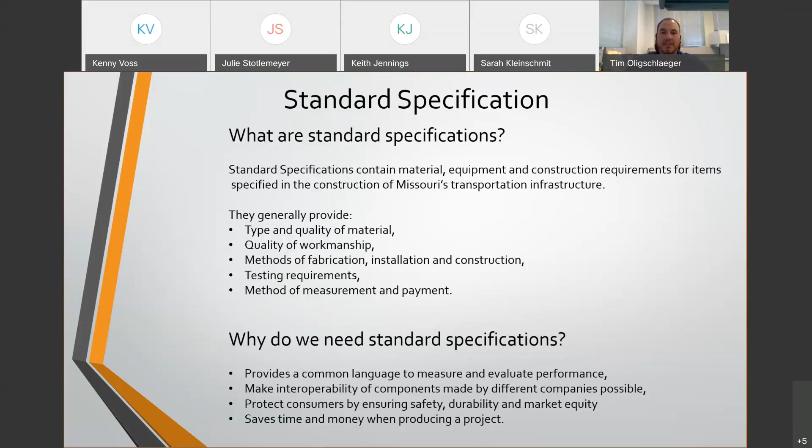You can access our standard specification from the EPG and other locations, but I'm going to show you how to access our standard specifications from MoDOT's homepage. Over in the right corner, you will see Doing Business with MoDOT. If you hover your cursor over Doing Business with MoDOT, you will get the following options.

Over on the right side, you will need to click on Standard Specifications, which is outlined with the red box. The page opens the Missouri Standard Specification for Highway Construction page, but you can access other standards and specifications like standard plans and job special provisions along the left side of the page.

In the first table, you will find the standard specification. We publish a new spec book every year, effective July 1 of that year. The original published spec book will always be at the bottom of the table. We make quarterly updates to the spec book, and you can find the revised spec book with the revisions included above the original spec book. The most up-to-date spec book will always be at the top as we add a new line to the table with each revision.

The next column over, you will find general provisions and supplemental specifications. This is where you will find what revisions were made to the spec book, but Sarah will talk more about this later.

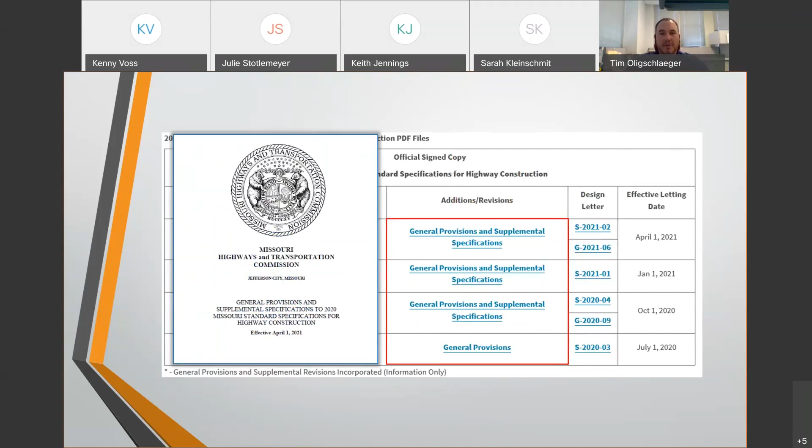The next column provides links to the Design Standards Letter, which provides a short description of the revisions to the spec book and general provisions. I will discuss this more later. The last column provides the date when the spec book and revisions are effective.

At the bottom of the specification page, you will see two tables. The first table is for the EPUB files for the current versions of the spec book. We create an EPUB file of the spec book so it can be uploaded to iBooks and downloaded to our customers' electronic devices like phones, tablets, etc. You can also download these files to your desktop. It will provide you with some different views and search options. Most people probably just use the PDF file and search it.

We also keep a Word file for every specification section. It makes it easier for staff to make and track changes. So if you ever propose a change to a specification, you can contact me and I can provide you a Word document of the section. In the last table, you will find the archived documents going back to the 2016 spec book.

We get a lot of requests from lawyers on what the specification was for this section on a certain date. We can go back in old spec books and find this information they need. We have more older specifications in the office, but you can easily come here and look up the information for the last 5 years.

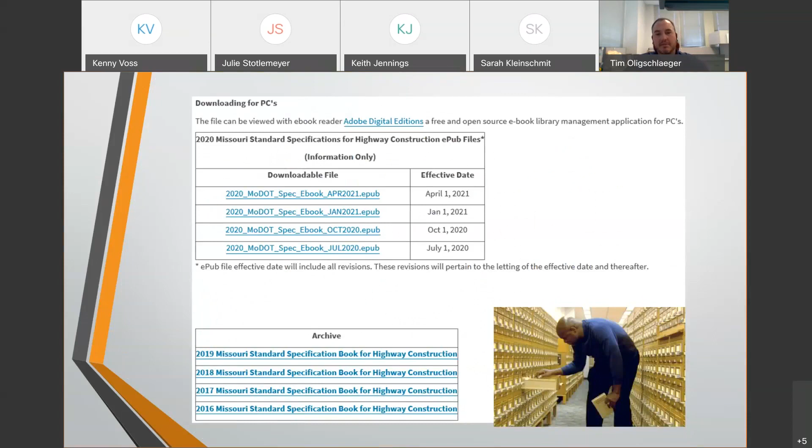Thank you, Tim. I will talk a little bit about the Missouri standard plans for highway construction. The information contained in the standard plans is like the standard specifications. This is where you go to see how work is going to be done if you're going to perform work for MoDOT. Any entity is bound to engage in their work according to these standards once they enter into a contract with us.

Also, like the standard specs, our standard plans are actual legal documents, and they are signed and sealed by a practicing licensed professional engineer. Typically, for us, this will be our state design engineer, state traffic engineer, and state bridge engineer.

Our standards are important for all stages of our projects. For designers, you build on these standards when you produce project-specific plans. You have anything from culverts, highway signs, ditch liner, or guardrail designed for and shown on the project plans, and we have the standards for them.

Contractors know how to bid and construct a project, and our construction inspection and material staff know how to ensure the projects are being built properly because we have these standards.

The standards are updated and published to the website quarterly throughout the year, and a new edition is published for the July updates each year.

The quarterly updates to the plans are a result of revision requests that we receive here in Engineering Policy Services. How and why these requests are made and who makes them will be discussed a little later in the webinar, but they do go through different levels of scrutiny depending on the complexity and cost associated with them before including the suggested changes into our standards.

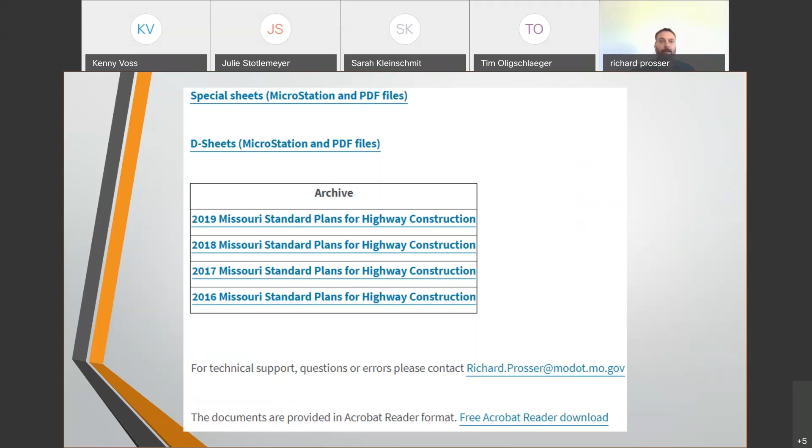The supplemental revisions contain only the plan sheets that we have received updates for after the July publishing, up to the date shown. The links farthest to the right in this table take you to the standard plan design letters, which list the sheets that have been revised, as well as a short technical description of what has been revised on that particular sheet.

The table below this one says individual MicroStation and PDF files, and this is where to find those. Clicking this link takes you to a page where the currently effective standard plans are kept, and you can view them a few different ways. The top link, effective 4/1/2021, will take you to a table of contents to access all the plans in PDF form. The links further below will take you to a page with all the sheets in that particular section.

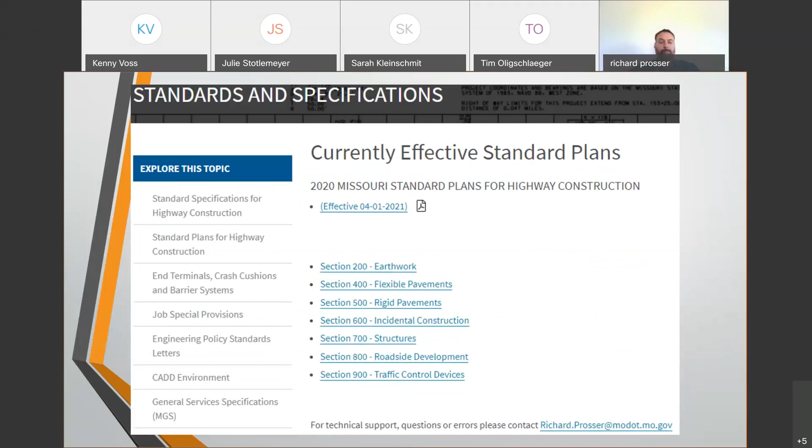And that is how you find our Missouri Standard Plans and some quick navigation around the website. I do encourage you to look around in there if you're not familiar with it. I want to show you a plan sheet and just talk a little bit about it.

All of the information found on the plan sheet shows us exactly how our roadway facilities are to be constructed. It's very important to understand every detail, dimension, call out, or table on any plan sheet pertaining to a project you're working on. This is a newer sheet - it was the addition of a third sheet to 902.70. Here you can see the main detail titled span wire signing, with some details and additional information.

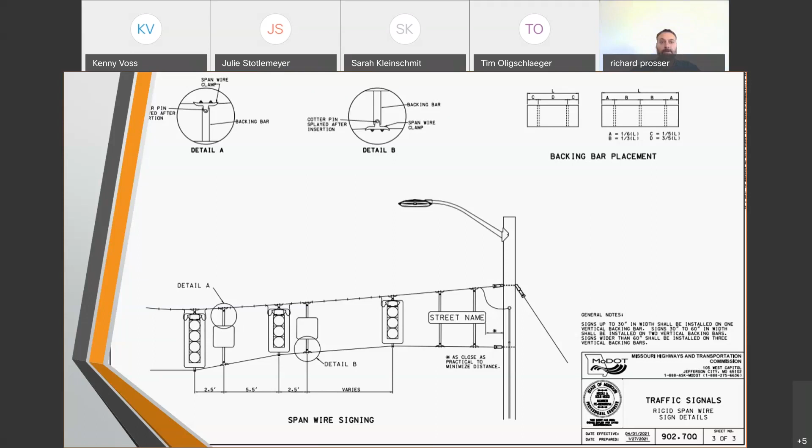Near the bottom right are the general notes and the title block in the bottom corner. Looking at the title block here, along the top, you see the MoDOT emblem and the Missouri Highways and Transportation Commission - these are our plans. Then the signature and seal of the engineer is shown beside the title.

Along the bottom is the date effective and date prepared, then the plan number, usually followed by a letter, and the sheet number beside that. The effective date tells you the last time the particular sheet has been revised, and it may be different than, say, sheet 1 or 2 within the same set.

With a minor change, the entire set won't get a new date, just the one sheet, but with a major change, each sheet within that set will get a new date. A similar thing happens with the plan number and the letter associated with it.

For a minor revision, the letter will not be updated, but each time a major revision is done - one that changes the way we do business, and we need to draw attention to it - the letter updates as well. So this one went from 902.70 with no letter behind it when first published, and is currently at 902.70Q, having received a major revision that many times.

I do take care of our standard plans and the revisions to them, and also that portion of our website. So if you ever have any questions about anything standard plans related, don't hesitate to give me a call or send an email. A link to my email address is provided at the bottom of the pages in the standard plans portion of the website.

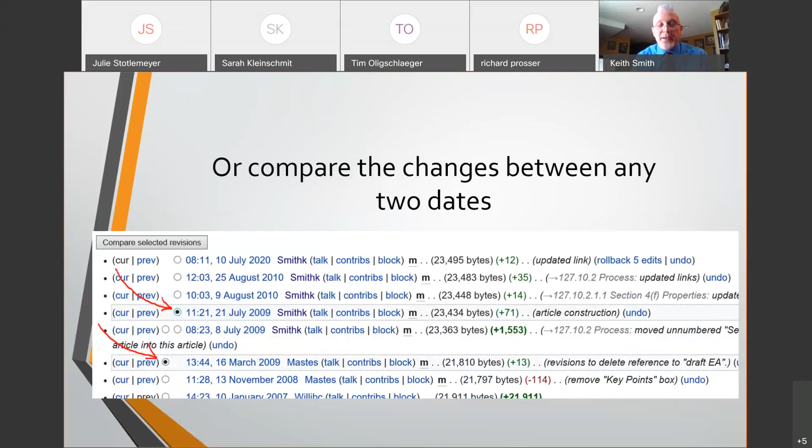Also, versions of the article from any two dates can be compared, and their differences shown on a line-by-line basis. What was removed from the older version will be shown on the left, and what was added to the newer version will be shown on the right.

On the article's history page, the revisions are categorized as major or minor. A bold M indicates a minor revision. That is, the policy was not substantially changed. Many revisions will also have a brief explanation.

There are many ways to access the EPG. The districts have a link to it on their SharePoint sites. You can type EPG MoDOT into DuckDuckGo or Google, and it will come right up. My favorite way is to just hit my browser and click the EPG icon in MoDOT's SharePoint site. The EPG is, of course, readily available on MoDOT's website too.

And now, let's go back to Engineering Policy Services Supervisor, Sarah Kleinschmit.

For this webinar, we are using an example set of plans from a real project. We chose this project because it has almost every facet of a project, from plan profile sheets to temporary traffic control sheets to cross-section sheets. The only elements missing are signals, lighting, and a bridge.

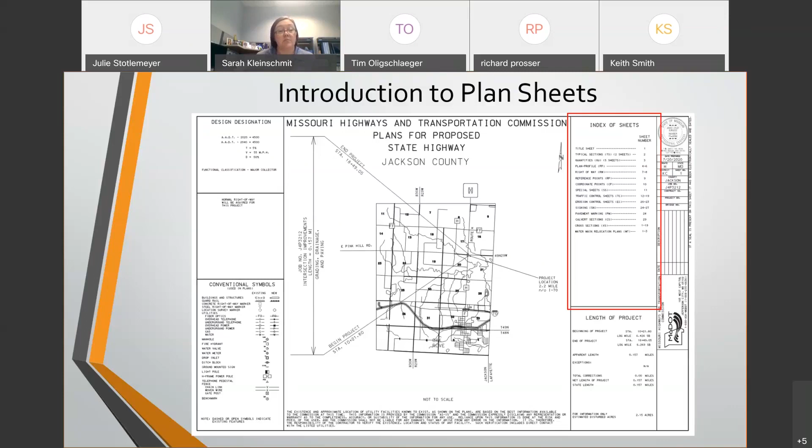As we go through the different aspects of plan sheet development and show you different specifications, standards, and EPG articles, a good starting point is EPG 237 contract plans. In each EPG 237 article, 237.1 through 237.14, there are additional links to other pertinent EPG articles, figures, specifications, and standards. I'm going to turn this back over to Keith to start us off with typical sections.

Keith? Thank you, Sarah.

So where does one go in the standards for information about typical sheets? EPG 237.4.10 would be a good place to start. It provides general information about what information to include on these sheets and how to get started producing the drawings.

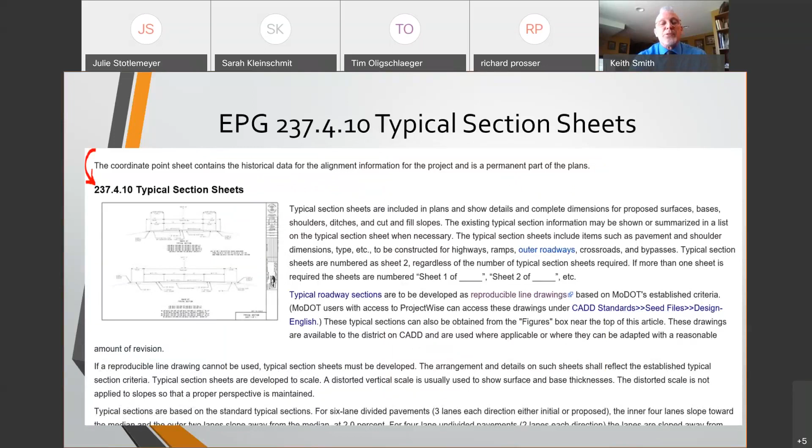Links in EPG 237.4.10 lead to useful general discussions about typical sections of the roadway in EPG 231. Links in EPG 237.4.10 also include a chart of how users with access to ProjectWise can access drawings.

EPG 237.13.1 Design Contract Plans provides guidance for filing typical sheets and for all the contract plans. This file naming convention is a vital part of the ProjectWise document management system.

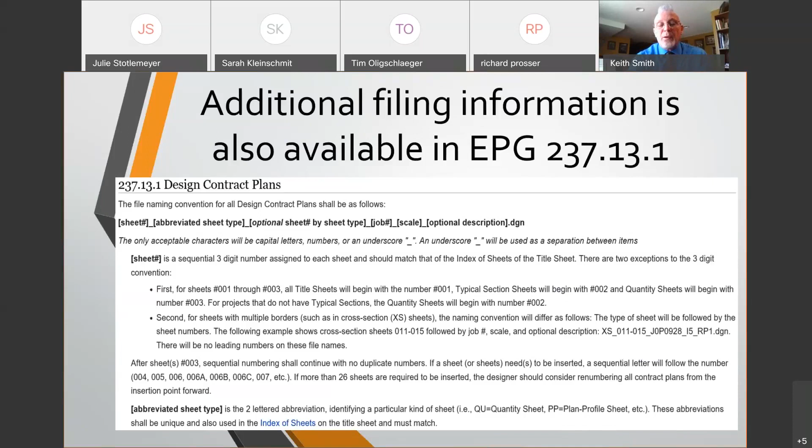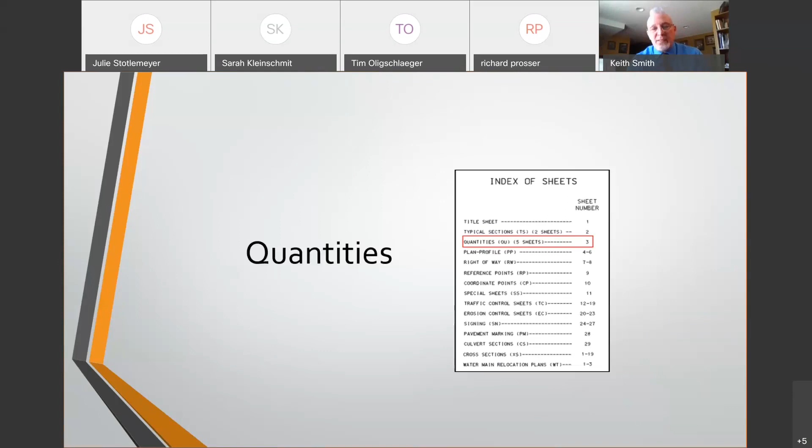In J4P 3212, following the typical sheets, are the quantity sheets. The quantity sheets summarize all the quantities from the plan profile sheets of a project. So where does one go in the standards for information about quantity sheets?

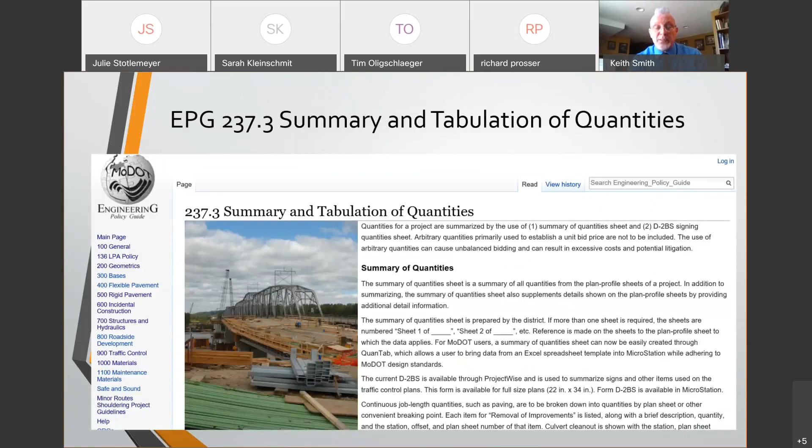EPG 237.3 would be a good place to start. It provides general information about what information to include on these sheets and how the district gets started producing the drawings.

The D2BS sheet is, of course, one of the D sheets. The D sheets are available on the MoDOT Standards and Specifications website. Just scroll down and the PDF and DGN files are readily available.

This Excel file, referenced in EPG 237.3, is available for loading the 2BS sheet. The designer enters the info and hits the Run button near the top left. This opens the 2BS file in MicroStation. In MicroStation, there is a button to pick up the Excel sheet's information and paste it into the desired MicroStation file.

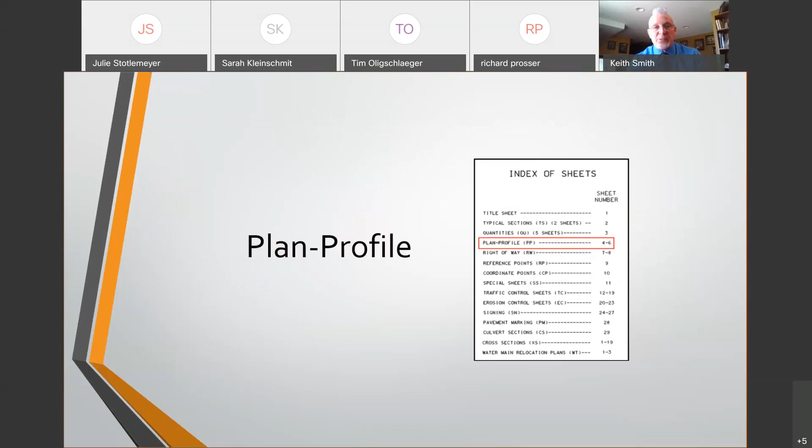Moving on in J4P 3212, plan profile sheets are after the quantities sheets. Of course, these important sheets show overhead and side views of the project and convey a general overview of the project by showing how the project interacts with the existing features.

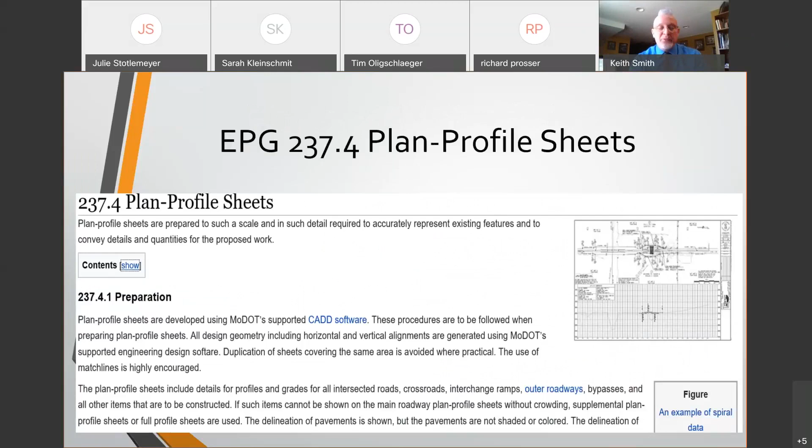Just as you would expect, EPG 237 contract plans also presents guidance for plan and profile sheets. EPG 237.4 plan profile sheets provides guidance for everything from general notes to the scale for these sheets.

The EPG is not the only standard addressing plan profile sheets. Standard Plan 203.00 presents plan profile drawings for excavation and embankments. While three standard plans, Standard Plan 203.20, 203.21, and 203.22 are available for super elevations, spirals, and widenings, should they be needed in the project.

I'm going to turn to Tim to continue with right-of-way sheets. Tim?

The next sheets I will talk about from the sheet index is the right-of-way plans. Here's one of the right-of-way plans. You will see that there is a lot going on here. All the offsets and stationing for each right-of-way and easement point fills up the page. The orange arrow is pointing to the existing right-of-way line, which is dashed, and the red arrow is pointing to the right-of-way line, which is solid.

With the intersection improvements for this project, they had to acquire a new right-of-way. The minimum width of right-of-way for each project is that necessary to accommodate construction and provide proper maintenance of the roadway without an undue number of jogs in the right-of-way.

Another part of the right-of-way plans is easements. The orange arrow points to the temporary easement and the red arrow points to the permanent easement, highlighted by the red box. This highlighted area is a list of any new right-of-way or easements purchased from the property owner. For Michael and Judy McGee, we purchased about 1/10 of an acre of right-of-way for this project. Right-of-way plans will have this for every property owner along the project.

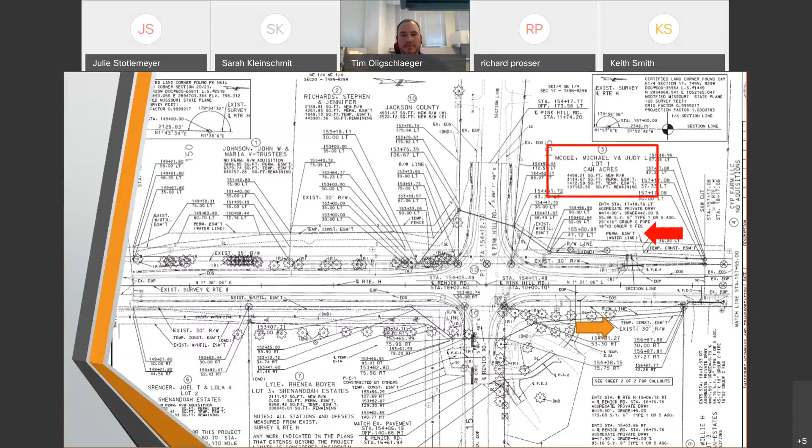Most of you are probably familiar with the different classifications of access control. However, what is important to know from a right-of-way standpoint is that access is a property right, and to limit or control this access, the property must be purchased.

For a permanent easement, we require this area for the use of a specific purpose, and it is intended to be reused in the future, but only for that specific purpose. For a temporary easement, we require this area for a specific time frame, which is usually the duration of the project.

A right of entry is permission to enter onto the property. This can be for a specific period of time and for a specific purpose. However, this can only be used to access the area. If any work or dirt movement is to take place, a temporary easement needs to be acquired.

To convey property, there are different types of deeds. A quitclaim deed is used to convey excess parcels. A general warranty deed is used to purchase property for our projects. Other deeds include, but are not limited to, special warranty deeds, deed of trust, and beneficiary deed.

Within the deed is a legal description. This is used to legally define the area and conveyance. This is done by a professional land surveyor and will be recorded as part of the deed at the recorder's office. The legal description includes metes and bounds as well as station and offsets and a centerline description of the route.

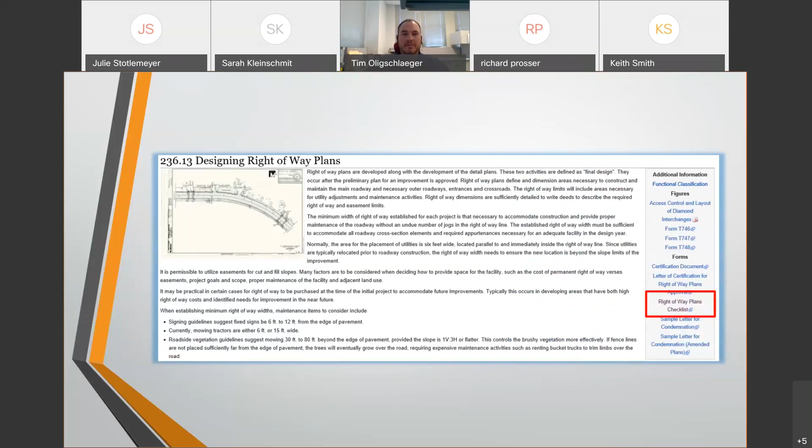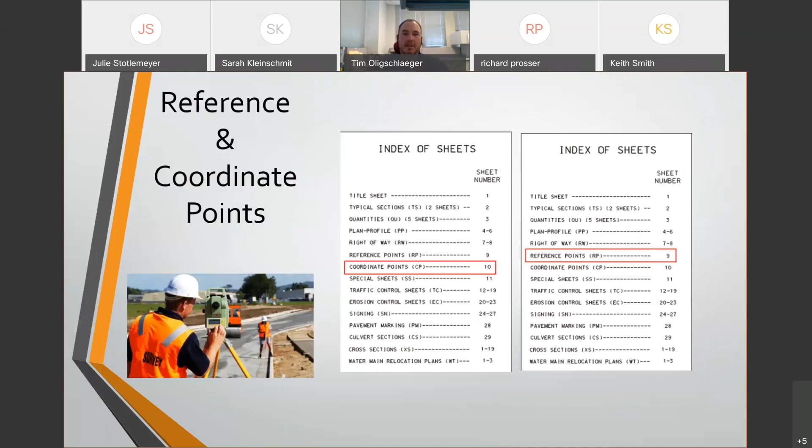The next sheets I will talk about from the sheet index are reference and coordinate points sheets. Reference points are prominent, easy to locate points in the terrain used to define the location of another point. The purpose of reference points is to provide locations to reestablish primary points.

On this reference sheet, for this set of plans, there are two control points. These control points are essential for establishing and reestablishing survey points. When I worked in construction on the 179 project here in Jeff City, we had a control point next to Idlewood Bridge that we would begin at each morning to calibrate our equipment and make sure everything was working correctly. These points aren't just for when construction is going on; they're also for the next person that comes along. Someone on a future project will be able to set up on that point and easily reestablish any point from the 179 project.

You can find information in the EPG on reference points in Articles 237 and 239. 237.4 provides information on creating reference point sheets, and 239 states reference point sheets should be included in the final plans.

Here's the coordinate point sheet for this project. In order to aid in the reestablishment of the alignment for the project, a listing of significant alignment and control points with their MoDOT modified state plane coordinates are included in the plans.

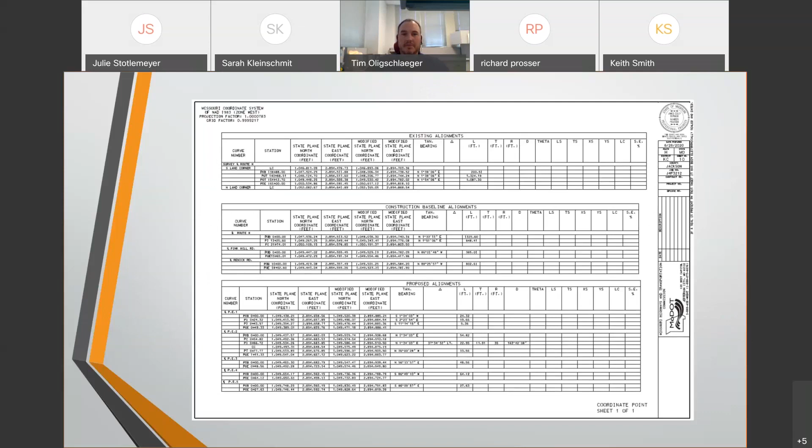You can find information in EPG Article 237.4 on what information to include on your coordinate point sheet and what points should be included. With each point, you should include the sheet number, station, location, offset, northern coordinate, eastern coordinate, description of the significant points, and GPK point ID. Coordinate points should be shown in feet to 2 decimal places, but may be shown up to 5 decimal places. The type of points that should be included are beginning and ending station coordinates of the project, alignment points, major centerline intersections, survey points used by survey crews, and other significant points.

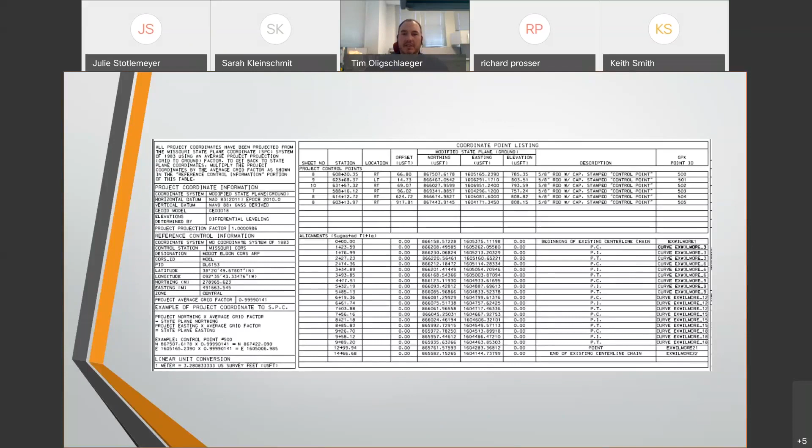I wanted to point out that last year they revised the coordinate sheet and put a new coordinate sheet in the design seed file for your use, which you can see an example of here. You can find this design seed file for the coordinate point sheet, the Excel file for the coordinate sheet, and the reference point sheet in ProjectWise under seed files design.

You can also find additional information about reference and coordinate points on what MoDOT should provide and what is required by the contractor on a project in Spec Book Section 627, Contractor Surveying and Staking.

The next sheet I will talk about from the sheet index is special sheets. Special sheets are usually included in a plan set if the project contains areas that require special attention to some construction elements. Construction details that are not covered in the design plans or elsewhere in the plan set must be shown on the special sheet.

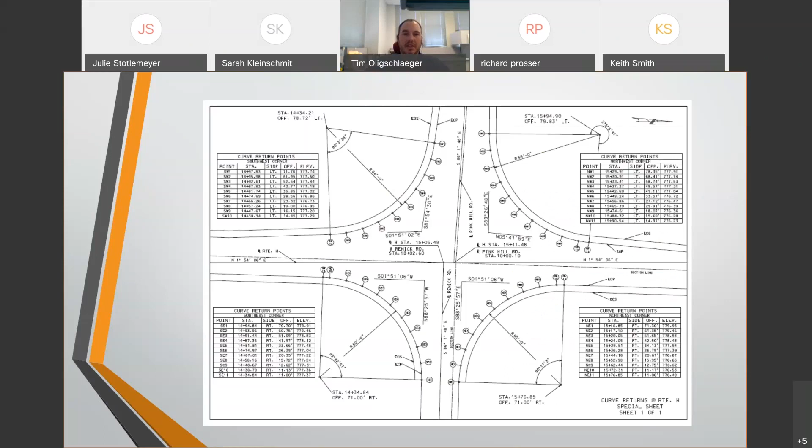Here's a special sheet for this project. You can see they have shown the curve returns for this project. You can show almost anything that is needed on special sheets.

Most of the information you will find on special sheets will be in EPG 237.4.11. It states it is preferred that the information is shown on the plan profile sheets, but can be used to enlarge details or show details that cannot be shown on the plan profile sheets. It also states lighting, signals, signing, and traffic control plans for a project may also be shown on special sheets. So there are numerous uses for special sheets, but there should be an effort to include all the necessary details in the plan profile sheets.

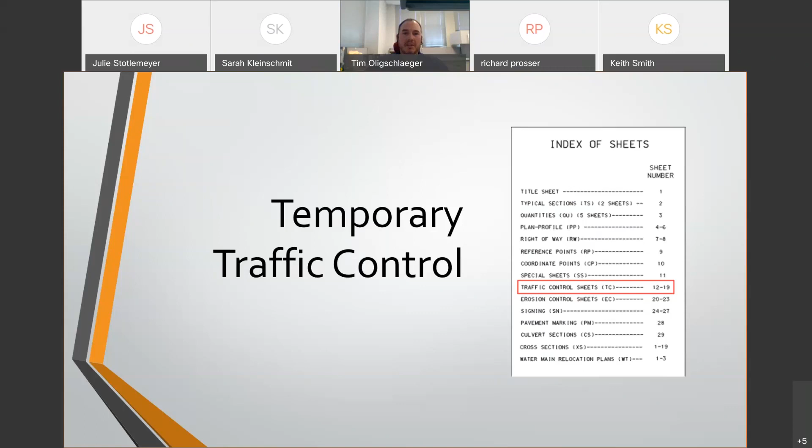The next sheets I will talk about from the sheet index is traffic control sheets. I will be mostly talking about temporary traffic control for this project. Temporary traffic control plans will accompany all plans for a construction project. The temporary traffic control plans provide guidance on maintaining traffic through a work zone. There's a lot of information in the spec book, standard plans, and EPG on temporary traffic control. I won't go into all of it in detail, but will highlight some areas.

In Spec Book Section 616, temporary traffic control, it provides specifications that work shall consist of furnishing, installing, operating, maintaining, cleaning, relocating, and removing temporary traffic control devices, equipment, and removal or relocation and covering and uncovering of existing signs and other traffic control devices in accordance with the contract documents or as directed by the engineer.

Section 1063, temporary traffic control devices, covers specifications for material to be used for temporary traffic control devices. For example, you can go here to see what type of material channelizers or signs should be made from.

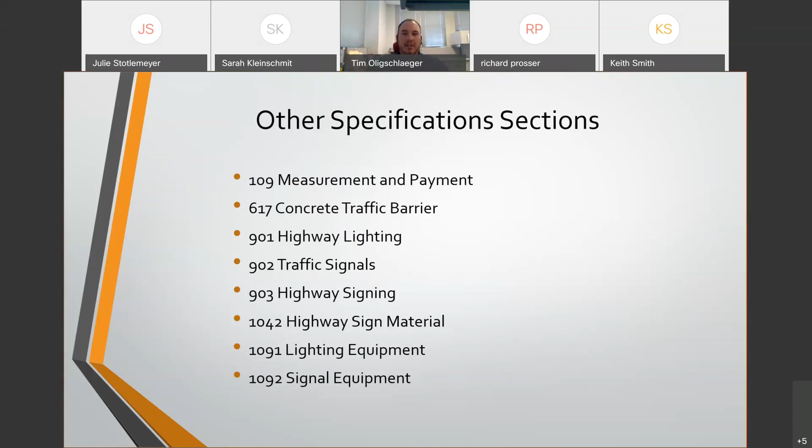There are several other specifications that also apply to traffic control and temporary traffic control: 109, measurement and payment; 617, concrete traffic barrier; 901, highway lighting; 902, traffic signals; 903, highway signing; 1042, highway sign material; 1091, lighting equipment; 1092, signal equipment.

Standard Plan 616.10, temporary traffic control devices, provides details for sign mounting, post installation details, channelizers and direction indicator barricade, type 3 movable barricade, delineator, changeable message sign, type 3 object markers, warning signs, warning guide, and regulatory signs, sign layouts, and traffic control for waterways.

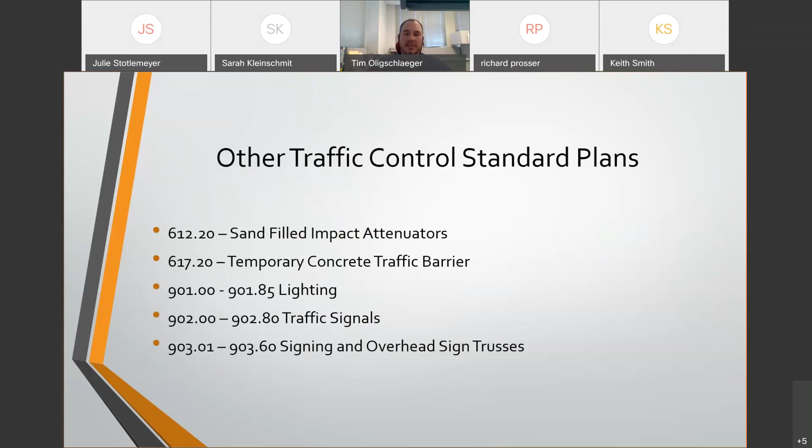There are several other standard plan sheets that apply to temporary traffic control and traffic control: 612.20, sand-filled impact attenuators; 617.20, temporary concrete traffic barrier; 901 through 901.85, lighting; 902 through 902.80, traffic signals; 903.01 through 903.60, signing and overhead sign trusses.

You can easily access typical applications, or TAs, on the main page of EPG 616. There are typical applications for maintenance and typical applications for design, construction, and materials. If you're designing temporary traffic control for a project being let by MoDOT, you will want to follow the guidance from the design, construction, and material TAs.

You can see here the EPG provides TAs depending on where the work area will be: work outside of the shoulder, work on the shoulder, work within the traveled way of a two-lane highway, work within the travelway of an urban street, work within the travelway at an intersection on sidewalks, and work within the travelway of a freeway or expressway. The TAs also provide several applications for different operations.

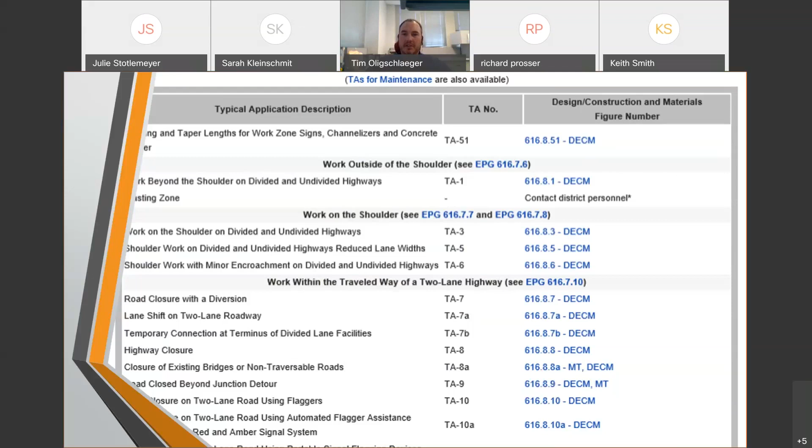For example, work on the shoulder on a divided or undivided highway, lane shift on a two-lane roadway, flagger control, resurfacing or movement operation, one-lane two-way operation, and several other applications. I believe there are a total of 56 TAs. The TAs only go up to TA 51, but several have a version A, B, C, etc.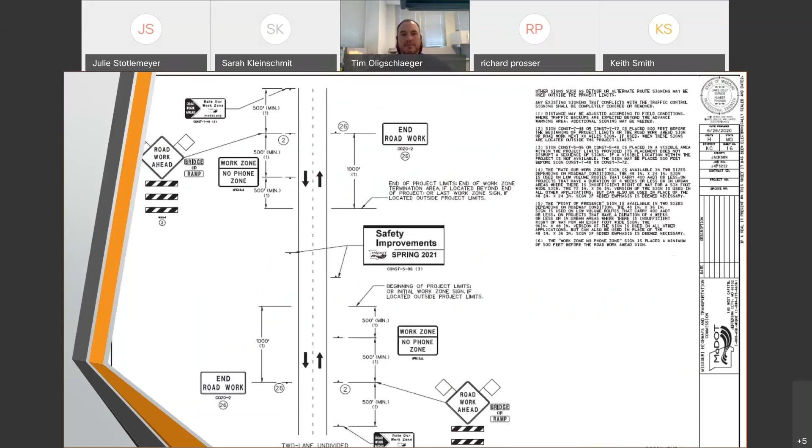It will provide a lot of the information you will need for temporary traffic control plans for this operation. Here's another sheet from the temporary traffic control plan that shows the signing at the beginning and end of the project. TA 50, beginning and end project signing, will provide you with a lot of the guidance you will need for this. I've shown these examples to illustrate that TAs located in the EPG provide a lot of the information for different operations you will need to lay out your traffic control.

Again, these TAs should not be used as your traffic control, but use the guidance from them for your temporary traffic control. These TAs will not cover everything, but if you have an operation you need help laying out the traffic control, you will need to contact your district traffic department and they will be able to help you. I could go on and on about temporary traffic control, but I hope you realize there's a lot of information in the spec book, standard plans, and EPG that can help you with temporary traffic control. Now I'm going to turn it over to Sarah.

Next on the list is erosion control plan sheets. Erosion and sediment control is a very broad topic. It includes which best management practices, or BMPs, to use, permanent versus temporary BMPs, stormwater control and pollution prevention, and the development of an erosion sediment control site map or plan.

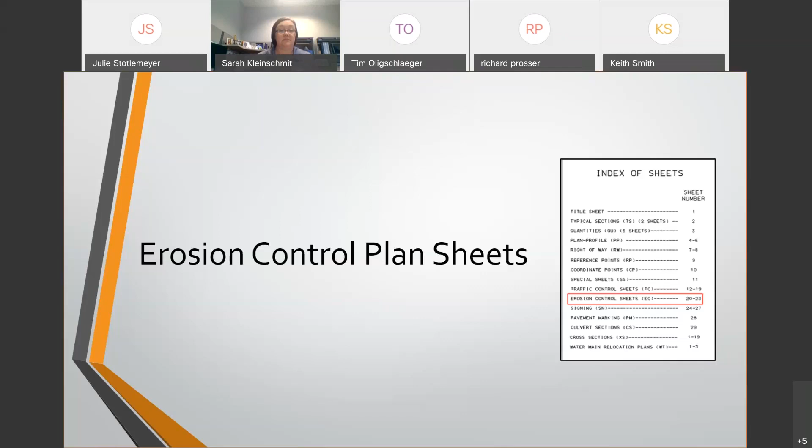What is the difference between erosion control and sediment control? Erosion is actually the process of wind, water, and other elements wearing down soil and/or rock. Sediment is the eroded particles. Sedimentation is when those eroded particles come to rest somewhere. Anytime soil is disturbed on a project, there is potential for erosion and the movement of sediment. The goal is to keep sediment on MoDOT right-of-way and preferably within the project limits. This is accomplished through the use of erosion and sediment control measures.

The Federal Clean Water Act, along with the Missouri Department of Natural Resources, regulates erosion and sediment control through required permits and a Stormwater Pollution Prevention Plan, or SWPPP, which we will talk about soon. EPG 237.4.12 tells you basically you have to have erosion control plan sheets if there's going to be any disturbed areas within the project limits. However, EPG 806 is where you really find the information regarding the different types of erosion control measures to use and when to use them.

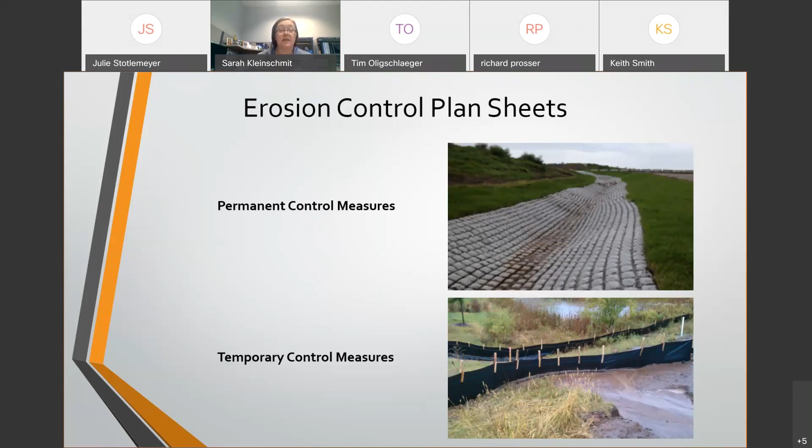Here I have a tied concrete block system lining a ditch as a means of permanent erosion control. We also have an example of silt fence capturing sediment as a temporary erosion control measure.

I mentioned the Stormwater Pollution Prevention Plan, or SWPPP. I'm not going to go into detail of the SWPPP because it is well written, and you can find that in EPG 806.8. Basically, we are responsible for keeping stream water and adjacent property water clear from sediment pollution on all projects. When the area of disturbed soil is 1 acre or more, then we switch to the SWPPP for pollution prevention. The SWPPP contains some of the same information provided in other EPG articles. The SWPPP provides information on the requirements of the statewide operating permit from the Missouri Department of Natural Resources and the project-specific erosion and sediment control site map.

Some information is provided in EPG articles 806.1 through 806.3 and in the SWPPP, which is 806.8. I'm not going to go through all the erosion and sediment control BMPs because there is another webinar for erosion and sediment control on MoDOT that you can watch. I will just touch on some of the most commonly used BMPs.

Let's go over some permanent erosion control measures. J4P 3212 didn't have any interception ditches, but interception ditches play an important role in erosion control and prevention. Interception ditches are special ditches to capture runoff on slopes and redirect the runoff to another ditch. These ditches are typically rock-lined. Interception ditches are often shown on the plan sheets, but can also be shown on the erosion control sheets. In Standard Plan 203.00, the interception ditch is shown with a levee.

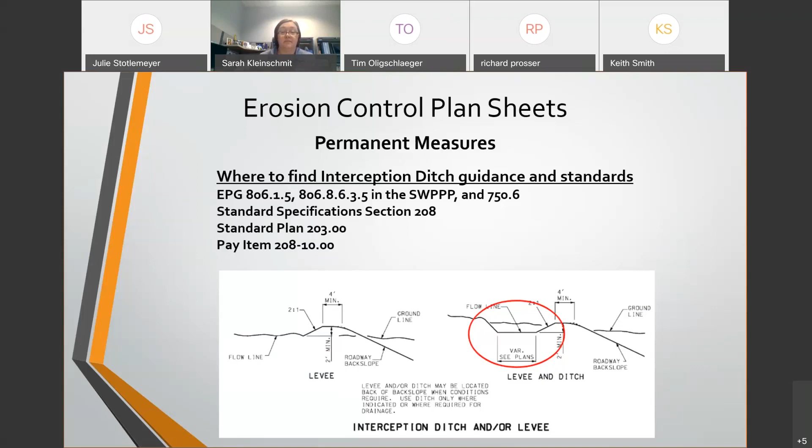Rock ditch liner is used to line ditches to prevent erosion from high velocity runoff. Hydraulic analysis and open channel flow computations are used to determine the shear stress in the ditch. If the shear stress is greater than that of a grass line ditch, then rock ditch lining is used. The different types of rock ditch liner are also found in EPG 750.6.3.3.

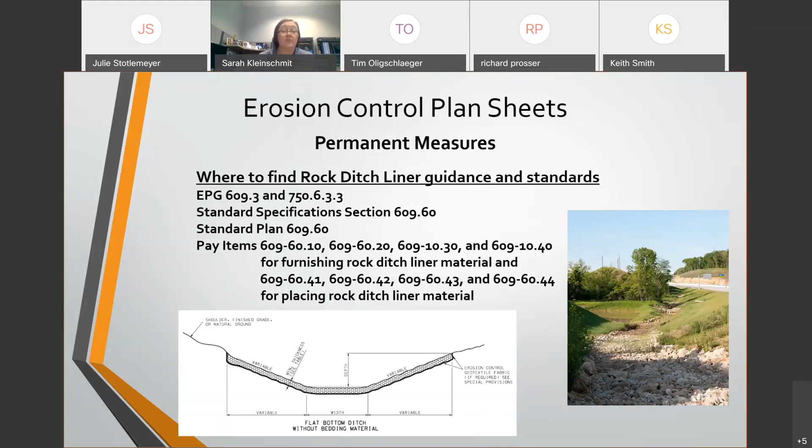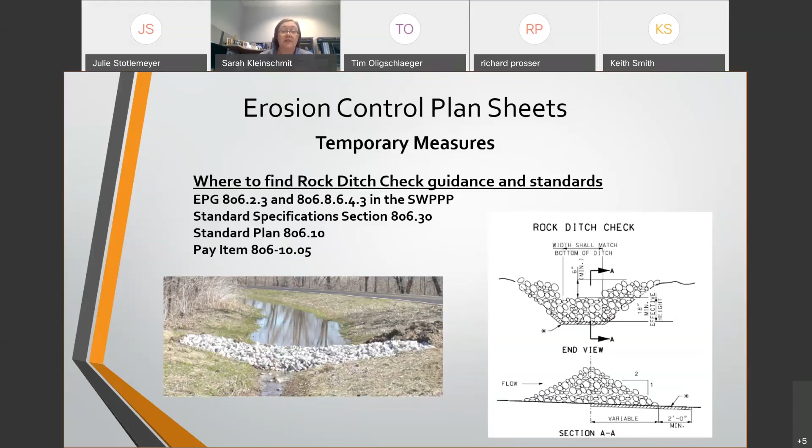While rock ditch liner is a permanent erosion control measure for ditches, rock ditch checks are a temporary measure. Rock ditch checks are used to slow high velocity runoff and trap sediment. When construction is completed, rock ditch checks can be spread out in the established ditch and function like rock ditch lining. Rock ditch checks can be left in permanently. However, they could become obstacles within the clear zone and should be avoided as permanent BMPs if possible.

Like rock ditch checks, alternate ditch checks also used as a temporary means of slowing high velocity runoff, usually for smaller drainage areas. Alternate ditch checks can be triangular silt checks, filter socks or logs, and sandbags. Straw bales, straw-filled wattles, and geotextile silt fence cannot be used as a ditch check. Project J4P 3212 uses multiple alternate ditch checks for erosion and sediment control.

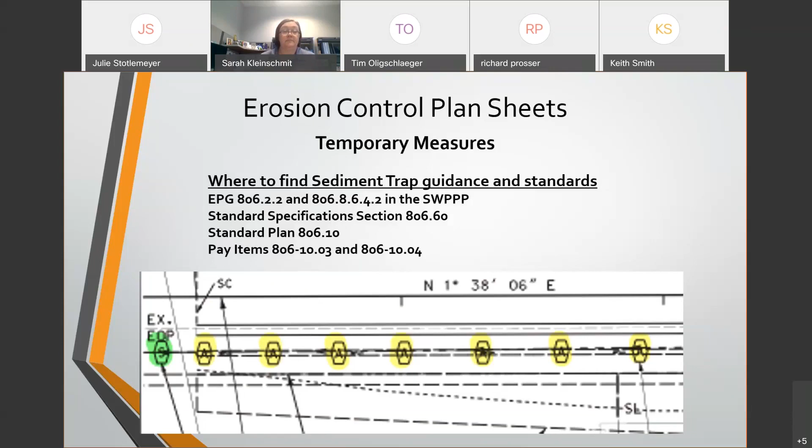Silt fence is used as a perimeter control for the construction project. It does have some limitations and should be used accordingly. J4P 3212 uses silt fence just beyond the slope limit, yet inside the right-of-way or easement. Do not forget to include sediment removal in your projects when you use erosion and sediment control BMPs that capture sediment.

When 1 acre or more of land is disturbed, a project-specific site map for erosion and sediment control measures is required. EPG 806.8.3 provides guidance for developing and maintaining a site map. It is recommended that 2 site maps be created, one for the existing site topography with outfall and perimeter protection BMPs, and a second one for final project grade and BMPs that are envisioned during project construction and upon completion of final grading. The location of design BMPs will be illustrated on the plan sheets.

However, the exact location of BMPs will be determined in the field by the engineer or inspector. Sample site plans are also available in EPG 806.8.3.

The next set of plan sheets is signing plan sheets. EPG 237.4.15 will direct you to EPG 903.2.25 for designing signing plan sheets and quantities.

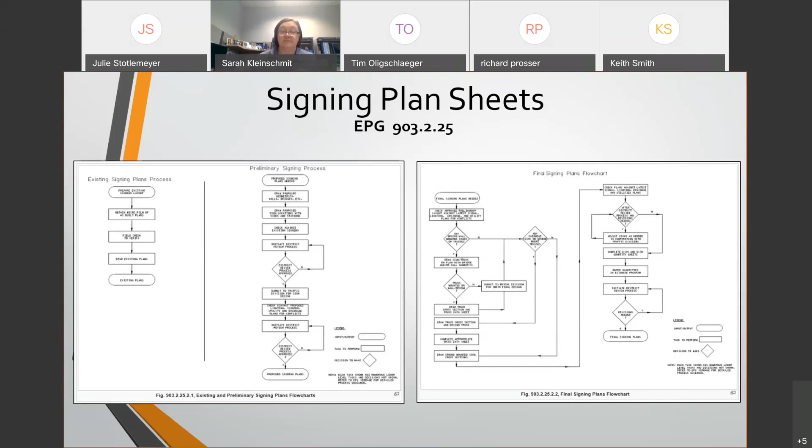Since there is more than just the plan sheets for signing, there's a certain order they go in. First to order in the plan sheets, our example project does include signing. Second in the order is the tabulation quantity sheets, D29 and D30.

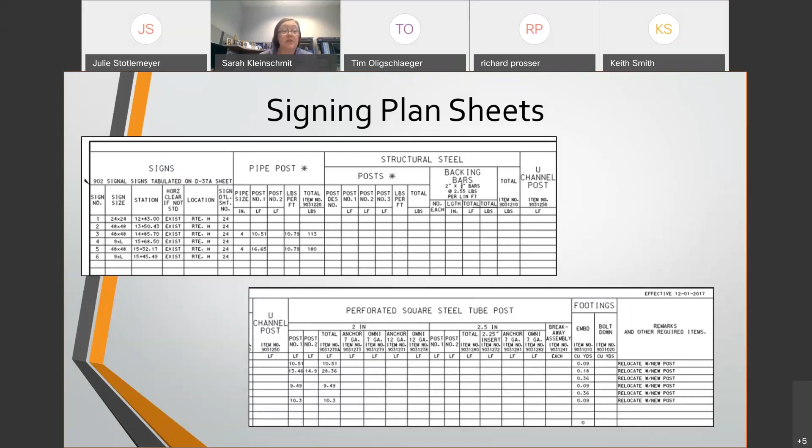D29 provides the sign information, the sign number and location, whether it is a pipe post, structural steel post, U-channel post, or perforated square steel tube post, and their lengths, backing bar information, and footings. All the totals are at the bottom of the sheet.

Next in order would be the D30 sheet. Since this project is using existing signs in new locations, only the D29 sheet is being used. The D30 sheet is where you would indicate the type of sign, flat sheet or structural, and the square footage for each sign. Then the totals are provided at the bottom of the D sheet.

After the D30 sheet comes the D31 sheet. It is for special sign details. Then D32 sheet is for cantilever and butterfly box trusses. Then D33 sheet, it is for overhead span trusses. And then D34 sheet is for tubular trusses.

After the D sheet comes the cross-section sheets for the signs. The cross-sections show the station or log mile, location, and the offset from the roadway. Each permanently installed sign should have a cross-section location.

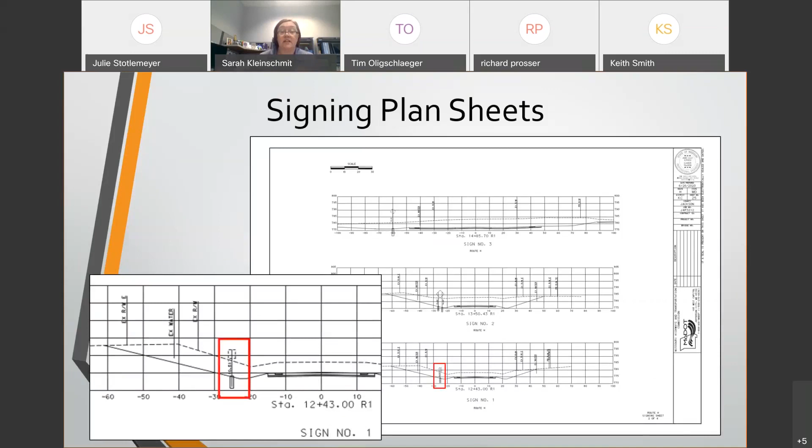To determine the type and number of signposts, you'll want to refer to EPG 903.3. There is a link to open the signpost selection guide. This is an Excel spreadsheet that you input the sign size, and the spreadsheet will calculate the signpost size and the number of posts needed.

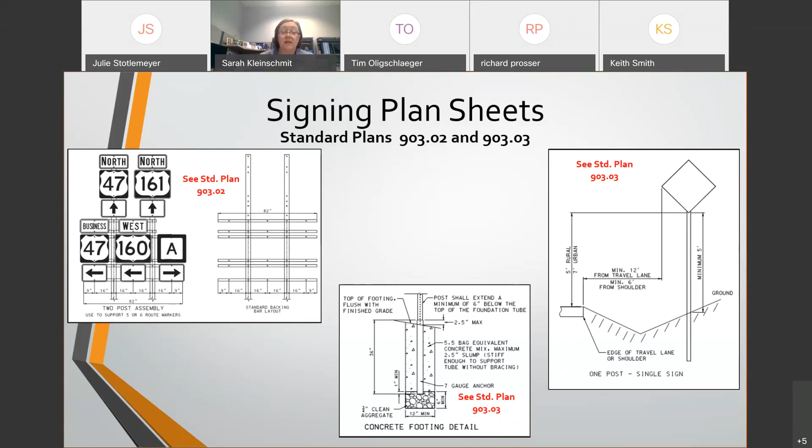The two standard plans you will use most are standard plans 903.02 and 903.03. You will use 903.02 primarily for backing bar information. You will use standard plan 903.03 mostly for post installation details and sign offsets. Standard plan 903.03 is also where you find delineator requirements.

Standard Specifications Section 903 provides the method of measurement for posts, sign area, and footings. This specification also provides the basis of payment, which also corresponds with the bid items.

Highway signing is governed by the Manual on Uniform Traffic Control Devices, or the MUTCD. Part 2 of the MUTCD provides standards, guidance, and options for permanent signing. Part 2 does not include work zone signs. The EPG, standard plans, and standard specifications all meet or exceed the signing requirements of the MUTCD.

Pavement marking sheets. Now on to those pavement marking sheets. Pavement marking plan sheets provide details regarding the color and size of the pavement marking. It will also provide details where to start and stop the pavement marking and whether it is permanent or temporary.

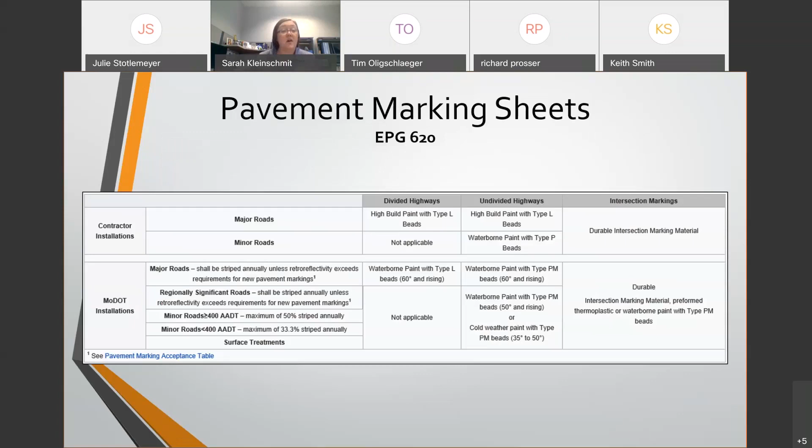EPG 620 provides general pavement marking guidance. When permanent pavement marking is provided in the contract, all major routes receive high build paint with type L beads, and all minor routes receive waterborne paint with type P beads, and all intersection markings are durable marking material.

EPG 620 also provides further guidance for permanent pavement marking with a flow chart. This flow chart provides the widths of those pavement markings.

EPG 620.1 provides further information on the material of the different pavement markings, guidance on temporary pavement marking, and even provides pictures for what the permanent pavement markings should look like for different roadways. A picture says 1,000 words.

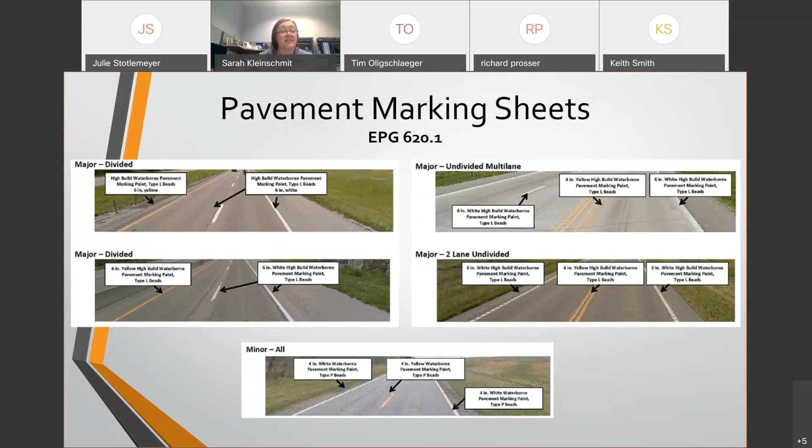Standard Plan 620 provides additional requirements for permanent pavement marking. Temporary pavement marking is a little trickier. It not only includes temporary paint, but it also includes temporary tape and temporary raised pavement markers. Standard Plan 620.10 provides the standard layout for edge lines, center lines, and shoulder markings, as well as the required colors.

Don't forget about pavement marking removal. Depending on the project and/or the work zone, sometimes the existing pavement marking has to be removed. When a project is constructed in stages, the temporary pavement marking may need to be removed too. EPG 620.1 also provides guidance for pavement marking removal.

Section 620 in the standard specification provides requirements for contractors, and also specifications for method of measure and basis of payment for permanent and temporary pavement marking paint, tape, raised pavement markings, and durable markings. The MUTCD also governs pavement marking. Part 3 of the MUTCD provides standards, guidance, and options for permanent and temporary pavement markings. The EPG standard plans and standard specifications all meet or exceed the pavement marking requirements of the MUTCD.

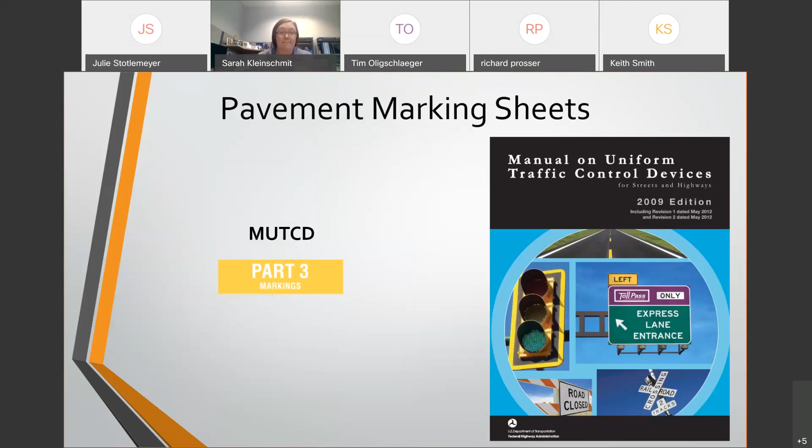This project, our example project, does not have lighting or signal plans. If this project did have lighting and signal plan sheets, they would go just before the signing plan sheets.

EPG 237.4.15 will direct you to EPG 901.10 for designing lighting plan sheets and quantities. EPG 901.10 is primarily about designing for cable conduit and rigid conduit size.

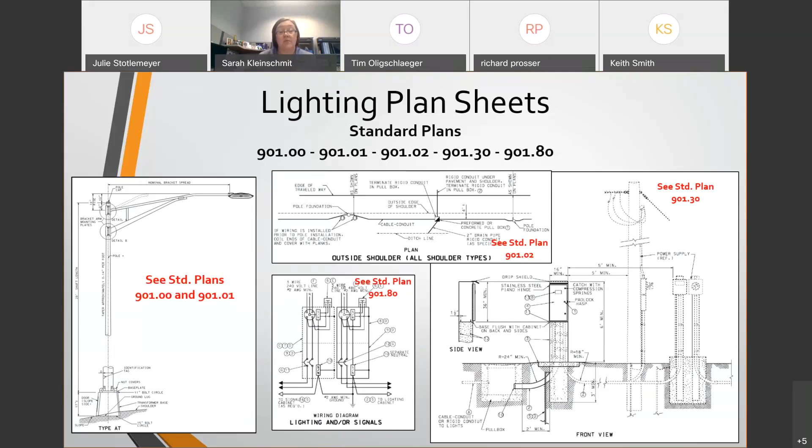There are 6 different sets of standard plans for lighting, all in the 901 series. Standard plans 901.00 and 901.01 provide details for poles, foundations, and appurtenances for 30-foot and 45-foot pole heights. Standard Plan 901.02 provides details for cable, conduit, and trenching. Standard Plan 901.30 provides details for control stations, while Standard Plan 901.80 is about power supplies. And last but certainly not least, Standard Plan 901.85 provides the symbols for use on lighting plan sheets. You can also select these different symbols and line types in MicroStation.

Section 901 in the standard specification provides additional information primarily for contractors. This section requires contractors to meet other national electrical specifications and codes.

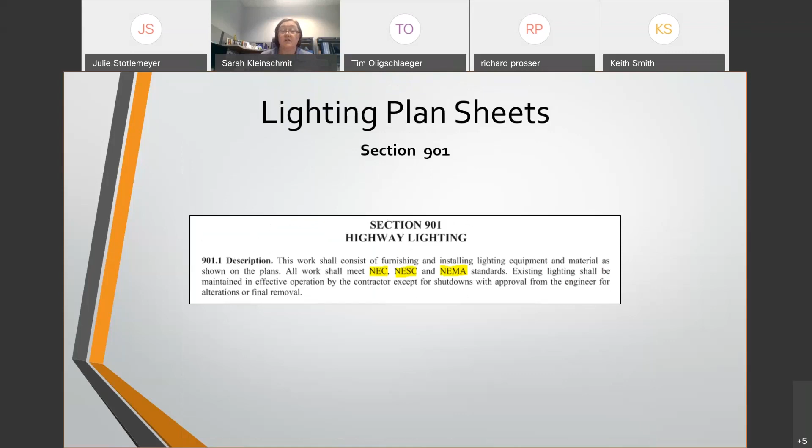All projects containing permanent highway lighting or traffic signal items, or temporary lighting and signal items retained by the Commission, require an equipment and materials list, or D15 form, for the contractor to fill out. This form is to be included in the project's electronic deliverables. See EPG 237.7 for a link to the D15 form and cover letter, and EPG 237.9.3.3.3 for electronic deliverables information.

Like lighting plans, EPG 237.4.15 will direct you to 902.15 for preparing traffic signal plan sheets. EPG 902.15 will walk you through the process of preliminary layout, location of the signals, bases, controllers, and power supplies, detectors, whether you should use loops, video, or radar, pull boxes, conduit, and cables.

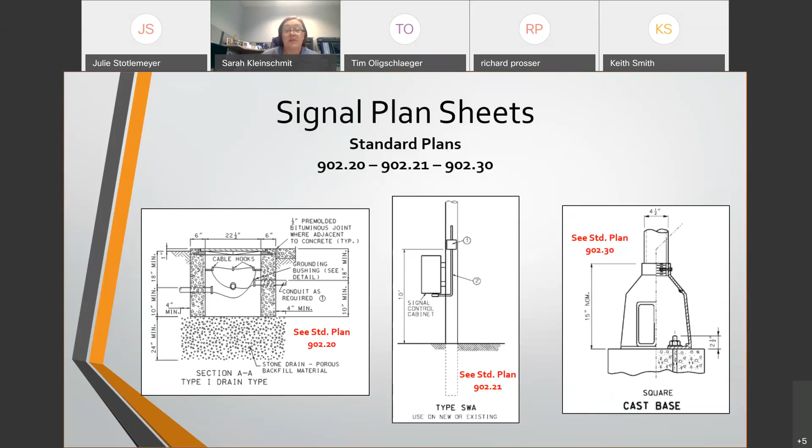There are a lot of standard plans for signals, even more than lighting. Moving on with signal plan sheets, the standard plans provide details for signal head mounting, as well as signal head louvers and visors, accessible pedestrian signal requirements, details for controller cabinets, and conduit locations. They also provide details on pull boxes, concrete and preformed, telephone interconnects, and post bases. The standard plans also provide details for tubular steel posts and mast arms. I do want to note that square or rectangular shaped posts for signals and lighting too are currently not standard.

Standard Plan 902.40 also includes the structural design load requirements. There is also loop detection details and span wire details. And just like lighting standard plans, Signal Standard Plans has a list of symbols to use on your plan sheets.

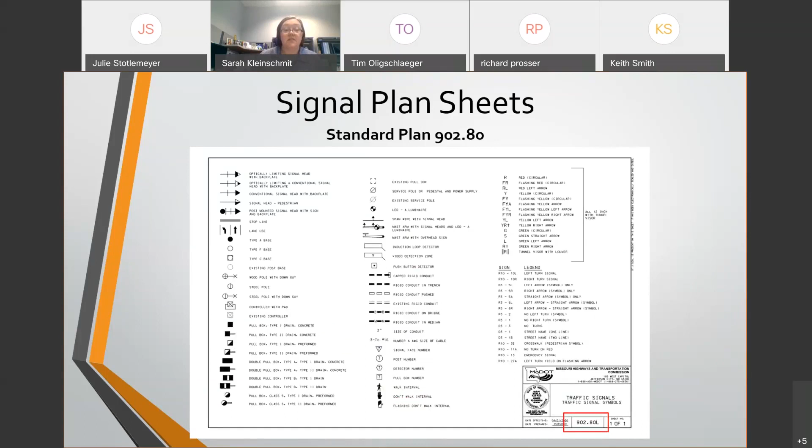D37B is used to show the conduit and cable types and their quantities. D37C is for items relating to the signal controller for the power supply, cabinet, coordination interface, detectors, and load switches. D37D is for the schematic of the conduit and cable installations. You also have D38 sheets. D38A through E are used for traffic phasing and color sequencing. For both lighting and signals, be sure to work closely with your district utilities engineer and your district traffic specialist.

Signals are also covered by the MUTCD. Part 4 of the MUTCD provides standards, guidance, and options for signals. Next, Rick will talk about culvert sections.

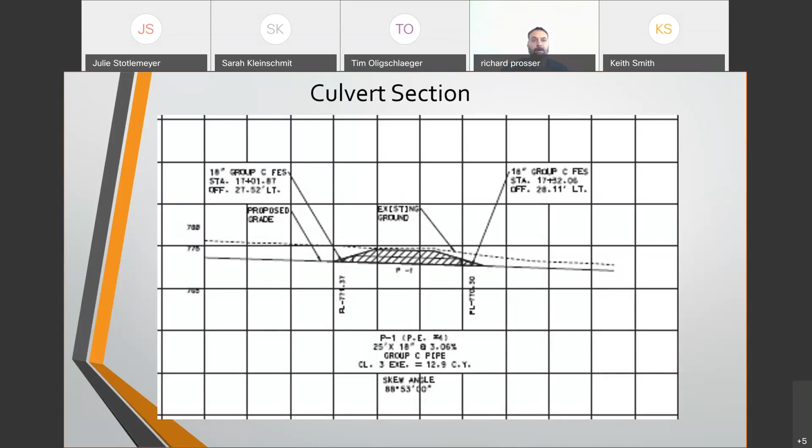As far as standard plans, the 700 section contains detailed plans for all of our different culvert configurations and types. And if you've ever looked, there are a lot of box culverts.

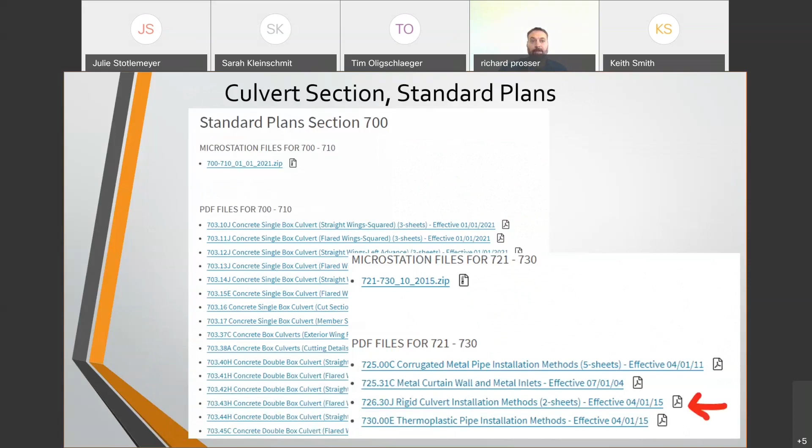Sections lower on the page pertain to the Group C pipe in this project, such as 726.30, detailing rigid culvert installation methods. Tables are included for the pipe diameter and fill height, embedding and compaction requirements for the culverts, as well as a cambered flow line detail, and trench and embankment installation details.

EPG 237, which discusses contract plans, and specifically 237.4.13, gives detailed information that is useful for interpreting the culvert section sheet, as well as exactly what they should contain and look like from a design standpoint.

Next in our index are cross sections. Our cross sections are generated from within MicroStation using geometry from the plan sheets.

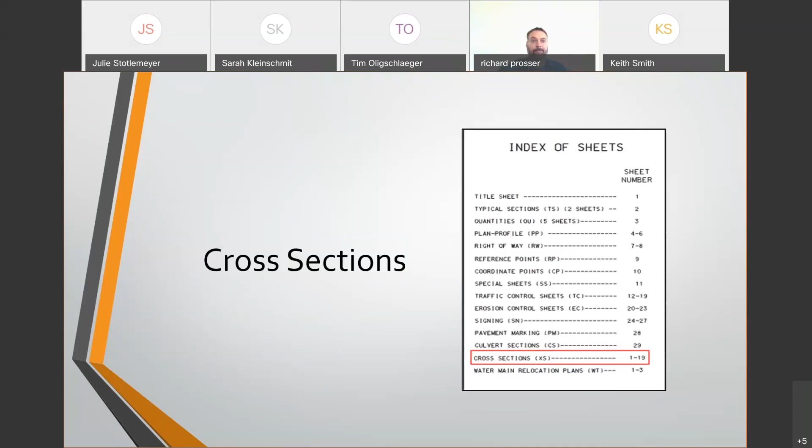Looking a little closer at station 11 plus 50 at the top, we can see that the sections show exactly what is going on at this location. Existing ground is shown as a dashed line across the section, and proposed grade is shown here as the solid line running across the bottom.

Key points are shown along the existing and proposed elevation lines, showing slopes and ditches. Also, the grade of the slopes is shown. Cut and fill for a job are calculated with cross sections, and it is shown here along the very bottom: a cut of 451 cubic yards and fill of 0 at this section.

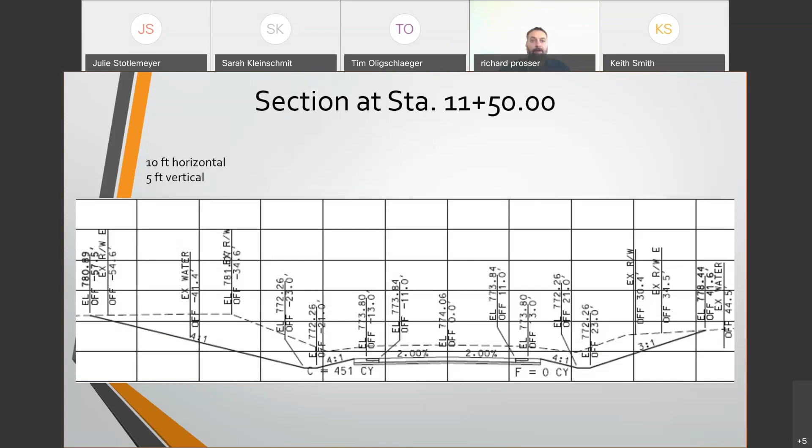EPG 237.14 provides guidance on electronic design data and drafting requirements that MoDOT has for these and other plan sheets.

The next sheets we will discuss are the water main relocation plans and utilities in general. Often when we design a project, it will be in conflict with an existing utility that will need to be relocated. The local governments that own the utilities have often adopted standards and specifications of their own, and they will develop their own project-specific plans, often employing a local consulting engineering firm.

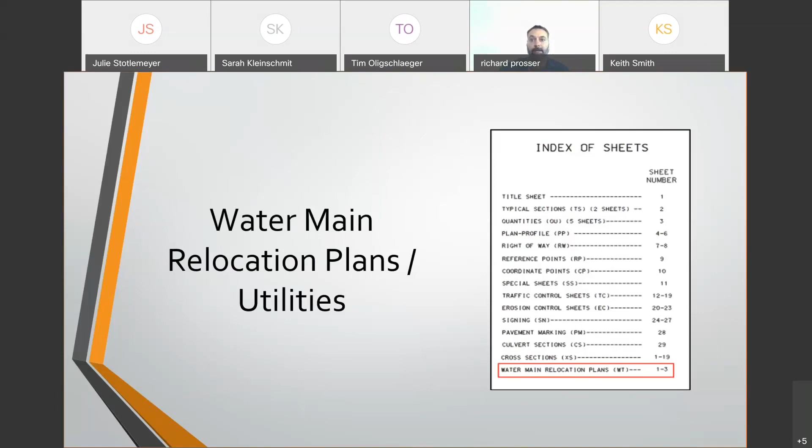On the next slide are some more details from the water main plans. These are more of the standards adopted by the locality, what they specify to keep their system uniform. We do have guidance for when utilities are within our projects and right-of-way. There are sections in the spec book and EPG that cover our responsibilities and offer some information.

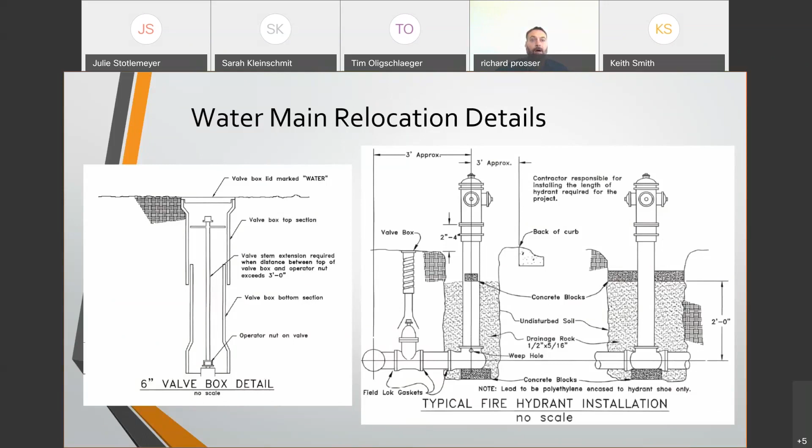The links to EPG 643 have a lot of information that covers utility procedures, including status and liability acceptance, local utility adjustments, public and private, as well as policy, standards and regulations, all the way to railroads.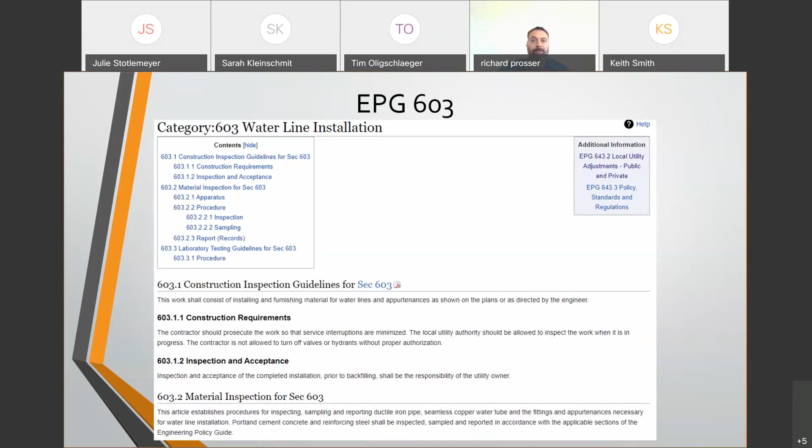The last section on plan sheets will be about bridge drawings. While our project does not have any bridge construction or rehabilitation, many of them will, so we can look into where to find this type of information. Our bridge division keeps up with their own bridge standard drawings and forms. A project containing bridges or bridge work will also contain job special provisions for performing the work within the contract.

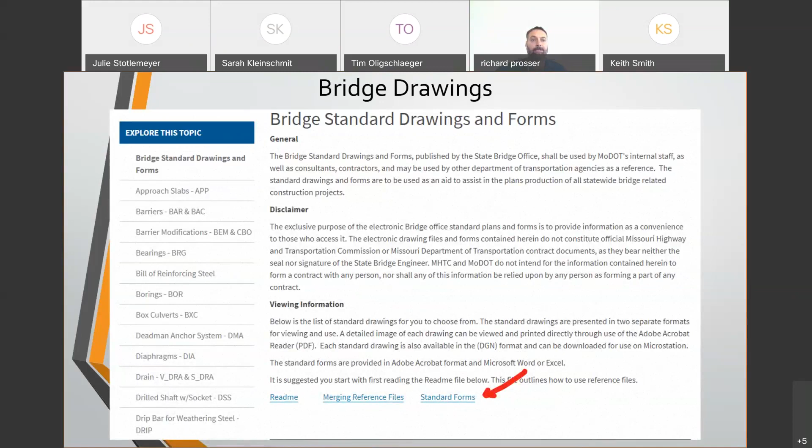Going back to the main bridge page and then looking for standard forms at the bottom, you'll be taken to EPG 101 standard forms. Here in EPG 101, you can locate and click on the link at the top or the one below to find some general forms and also bridge forms related to design.

That is the end of our discussion on plan sheets, and I will now get you back to Tim to discuss JSPs.

Rick wrapped up the plan sheet part of this project, but now we are going to look at another very important part of the project, and that is the job special provisions, also known as JSPs. What are JSPs and why do we need them? Special provisions are included in the contract as required to define work or procedures not covered in the standard specification, and as necessary to supplement or modify items in the standard specifications.

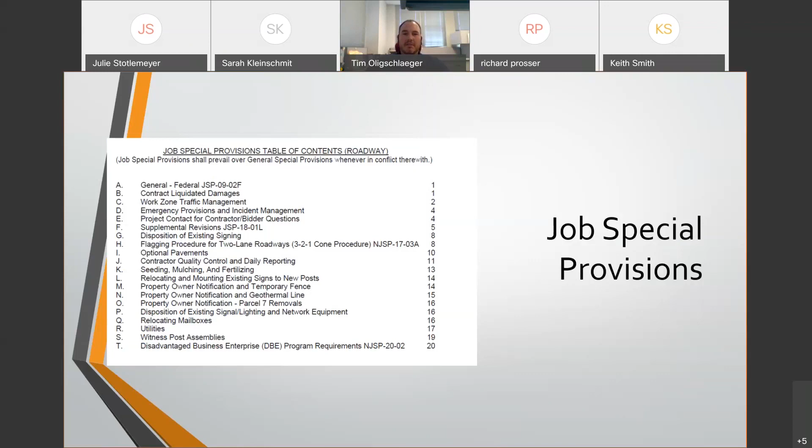As it says at the top of the screen, job special provisions shall prevail over general special provisions whenever in conflict therewith. So if there's ever a question on an item, whether they should follow the JSP or standard specifications, they should follow the JSPs as it prevails over the standard specifications.

EPG 237.5 special provisions provides a lot of guidance on JSPs. JSPs are usually prepared by the district to cover items of work unique to the specific project and not adequately explained on the plan or in the standard specifications.

There are certain JSPs that are required on every contract. In EPG 237.5.3, required job special provisions, you will find guidance on the required JSPs. The first JSP in every contract is the general state or general federal JSP. This provision tells the contractor whether a project is to be constructed under federal or state requirements.

The second JSP is contract liquidated damages. This provision tells the contractor when they may begin work on the project, when they have to complete the work, and what liquidated damages will be assessed if they fail to complete the work on time. This JSP should not be included in JOCs.

The third JSP is work zone traffic management. This provision covers traffic management situations not covered in standard specification. This provision is not included in JOCs.

Utilities JSP. This JSP tells the contractor the contact information for each utility and the status of any known utility adjustments. This JSP is required on any project with a utility adjustment.

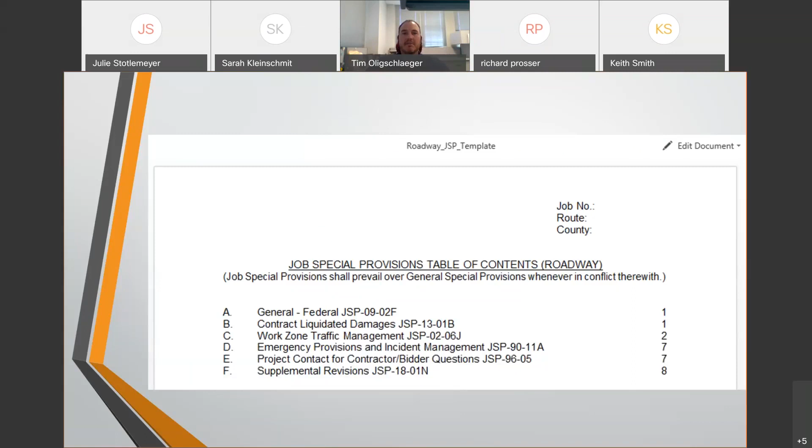You can see we provide a template that gives you 6 JSPs required on all projects. You will notice all these JSPs have numbers behind them as they are standard JSPs. If there is a letter behind the number, then it has been revised and that is the current version. So before you turn in your JSPs, you may want to run through the table of contents and make sure you have the latest versions.

You will notice if we go back and look at the JSPs for this project, there are a lot of standard JSPs that don't have numbers behind them, like contract liquidated damages and work zone traffic management. When the numbers have been removed, that indicates the standard JSP has been modified. It is preferred not to modify the standard JSPs, but it is understood there are cases where they need to be modified. And if that is the case, you need to make sure you remove the JSP numbers from behind the JSP title.

I'd like to go over the different JSPs listed on the JSP SharePoint site. Standard JSPs are JSPs that are common but don't have a place in the standard specifications. Non-standard JSPs are JSPs that may have a place in the standard specifications but need to be piloted on some projects before revising the standard specifications. There may also be JSPs where we normally want what is in the standard specification, but in some cases we want a different specification.

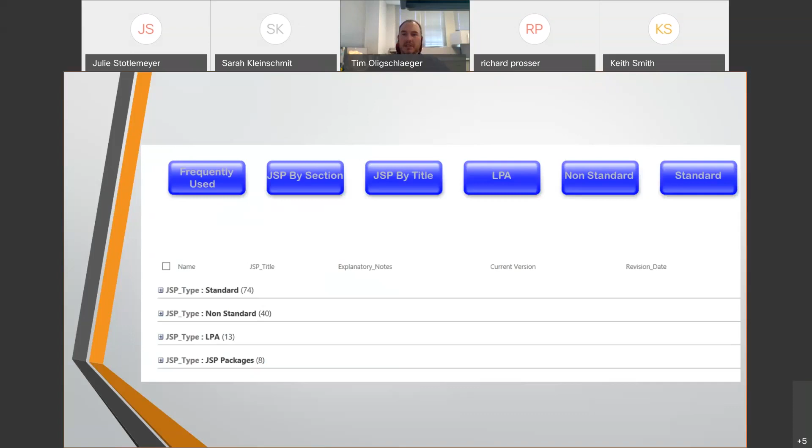LPA JSPs are self-explanatory. They are JSPs for the local public agencies. JSP packages are where we have put together all the required JSPs for typical JOC, CLC, and seal coat projects.

If you need help creating a set of JSPs for your project, you can look under the standard JSPs, and there is a JSP named Roadway JSP Instructions. This JSP will show you how to map the JSP SharePoint site to your network drive, selecting your JSPs, adding and editing the table of contents, and other tricks that will make it easier to modify your JSPs.

Next, I'm going to talk about bid items, also known as pay items. What are bid items? Bid items contain the description, units, and accuracy of the pay items in the contract for construction of Missouri transportation infrastructure.

Why are they called bid items and pay items? It just depends where you are in the process. If you're using them for the estimate for the contract to bid on, they're called bid items. If you're in construction using these item numbers to pay the contractor, they are called pay items.

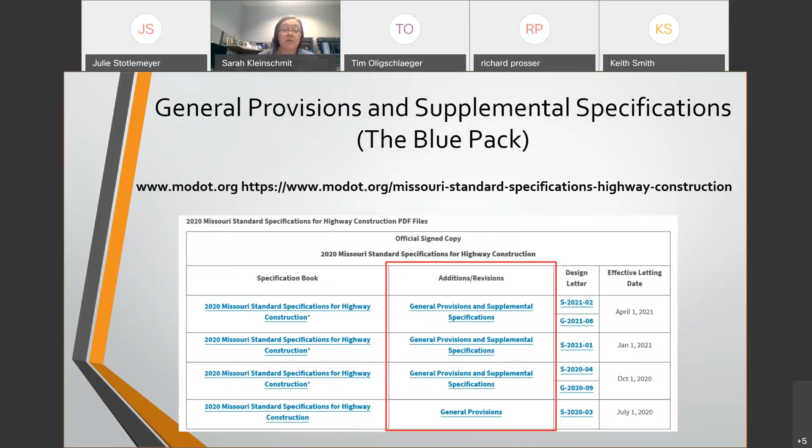Tim pointed out earlier where the standard specification items are located on MoDOT's internet. You can find the general provisions and supplemental specifications in the same location. Because the general provisions and supplemental revisions are contractually binding and legal documents, they are signed and sealed by MoDOT's chief engineer. The general provisions are currently listed in two sections, Division 100 provision and Division 600 provisions.

And then there are the revisions to the standard specifications. Division 100 and 600 provisions are basically additional specifications that do not easily fit into the standard specifications. Some of the provisions are regulations or laws that we at MoDOT have no control over, such as Section 401 Water Quality Certification Conditions and Section 404 Nationwide Permit General Conditions.

The supplemental revisions to the standard specifications are just that, revised specifications. The standard specification is only 'printed'—I use air quotes, because it is electronic—really only produced once a year in July. In July 2021, the 2021 version of the spec book will be produced. Until the spec book is produced in July, revisions to the spec book are located in the supplemental revisions. Again, you will want to check the supplemental revisions to ensure you're using the most up-to-date version of the specifications.

Here are a couple examples of revised specifications. Note the effective date on the right-hand side. That indicates when the specification became effective. Now back to Rick to talk about what happens after the contract is awarded.

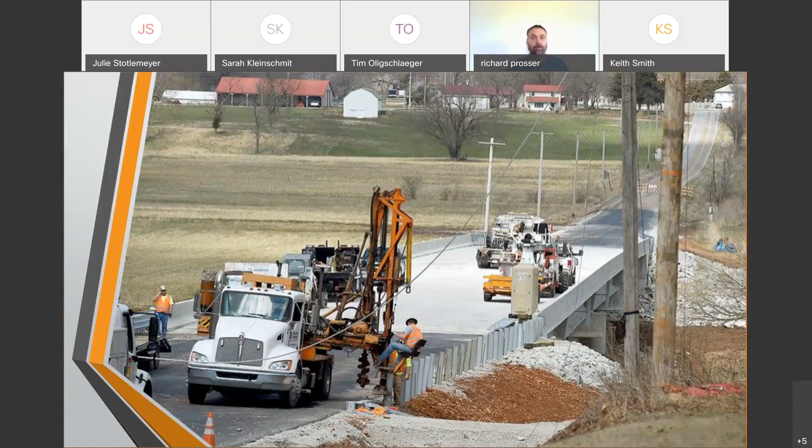In doing so, the RE and their staff are out there using their knowledge and experience, along with the many documents and tools that we have discussed that are available to them. They use our policies, plans, specifications, contractual documents, and their collective authority to assure quality on our construction projects and answer questions that may arise.

There is a hierarchy of these documents, and they start with the signed contract and the project-specific plans. If there is ever a discrepancy between contract documents, standards, and specifications, or any questions that need answered, the hierarchy is as follows.

First, starting out with job special provisions. These are in the contract. Next, you look toward the project-specific drawings. These are our project plans, cross-sections, bridge plans. Next will be the general provisions, also in the contract, and the supplemental specifications from the contract.

Following that are the standard specifications. These are our Missouri standard specifications for highway construction, and then the standard drawings, our Missouri standard plans for highway construction. And last, you would look toward the bid items or quantities from the contract.

Any deviations from any of these standards or contract documents must be through the RE in the form of a change order. This is our required documentation that something differs from the contract or our policy. Keith will talk more about documentation and forms here in just a bit, and with that, I will turn things back over to him.

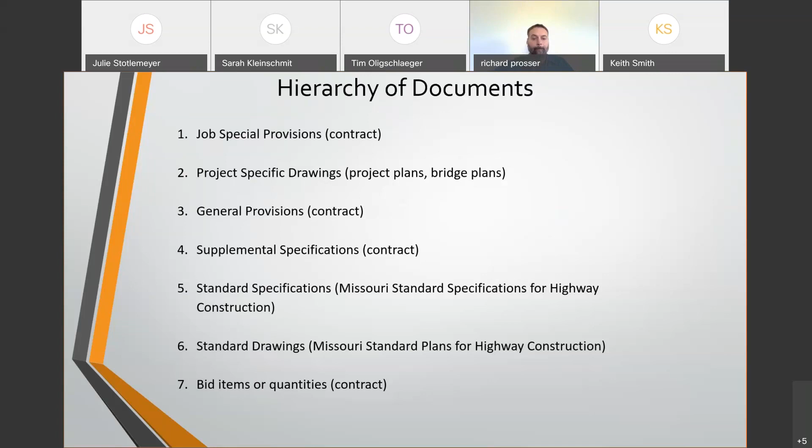Thank you, Rick. Recent changes to the EPG are always available from the EPG's main page. Scroll a little way down to Recent Policy Changes in the EPG and click it. You will find the 25 most recent noteworthy changes from about the last 2 or perhaps 3 months. These entries will have links to the articles or forms that have been updated, as well as a brief description of the change.

Speaking of changes, how are the standards updated? How does a proposal become policy? Well, the Engineering Policy Services Group is actually open to ideas from practically everybody. Do you see a standard plan or an EPG article that has some sort of error? Let us know, and we will get it corrected.

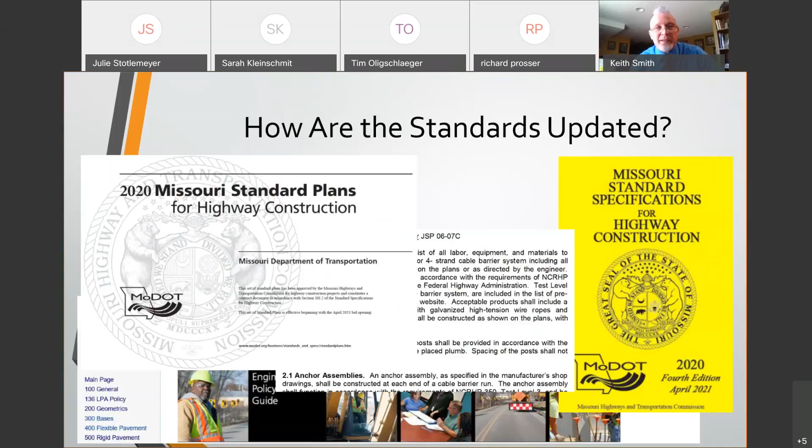But all revisions to MoDOT standards must be authoritative. And if the proposed revision involves some policy or procedure, the proposed revision has to be endorsed by a division or other authoritative source. Proposed revisions are submitted using the Engineering Policy Revision Request form. But what happens after the proposed authoritative revision has been submitted?

The Engineering Policy Services Group determines whether proposed revisions may update the standards without being balloted, or if they need to be placed on a ballot and approved by the Assistant Chief Engineer or the Chief Engineer.

If a proposal involves a routine technical matter, an errata correction, or a clarification, it is a level 1 revision and can be approved without comment from the district engineers, the division engineers, or the chief engineer. The standard will be revised as necessary.

If a proposed revision is determined to be a moderate technical change, or if it requires specific expertise, for instance, structural design, or if it impacts more than one division, the proposal is processed as a level 2 ballot item and must be approved by the assistant chief engineer.

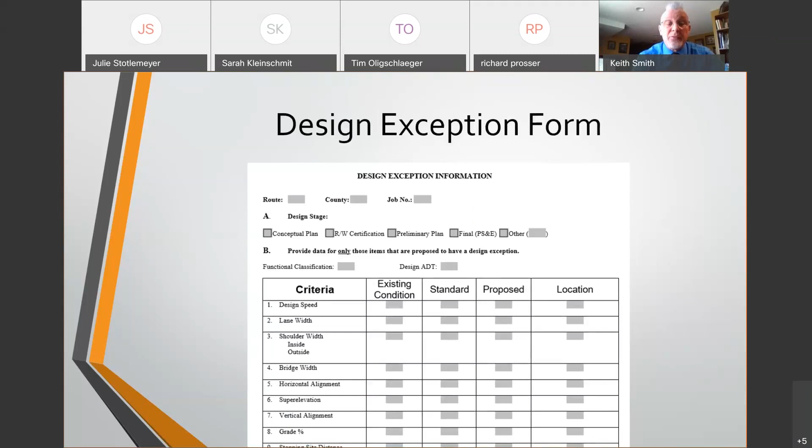The help article also provides information on how to fill out the Engineering Policy Revision Request form. Speaking of forms, the EPG presents all the forms you need to do your work. For instance, one of those forms is the Design Exception form. Anytime the project is impacted by something or includes something that is not standard or policy, it must be documented. Also, everything that is constructed differently from what the project plan shows must be documented. The Design Exception form is available in several articles, but probably its most convenient location is in EPG 101 Standard Forms, where you can find it listed under either Bridge Division or Design Division.

Another useful form, the Change Order form, is available in EPG 101 Standard Forms as well. Construction and Materials has included it in its lengthy listing of important forms.

Now it's time to talk about design standard letters. Design letters document revisions to MoDOT policy and standard specifications. There are 3 design letter types: general letter, standard plans, and standard specifications. The general letter type covers revisions to general policy items like the EPG, bid item list, and general provisions. The standard plans and the standard specification letter types, of course, cover the revisions to those documents.

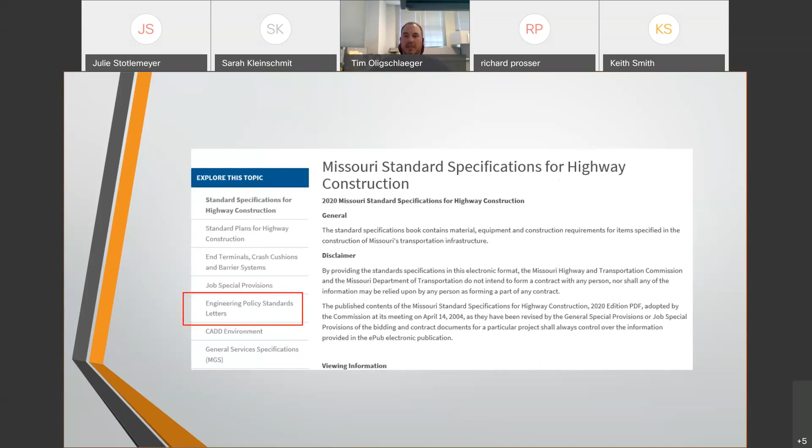You can access the design letters in multiple locations. As shown earlier, you can access the design letters from the standard specification page. You can click on the engineering policy standards letters link, or you can go down to the specification table. Here you can access the design letter that pertains to the current specification. You will notice some quarters have an S and a G design letter included in them. The S is for the revisions to the standard specification, and the G is for the revisions to the general provisions.

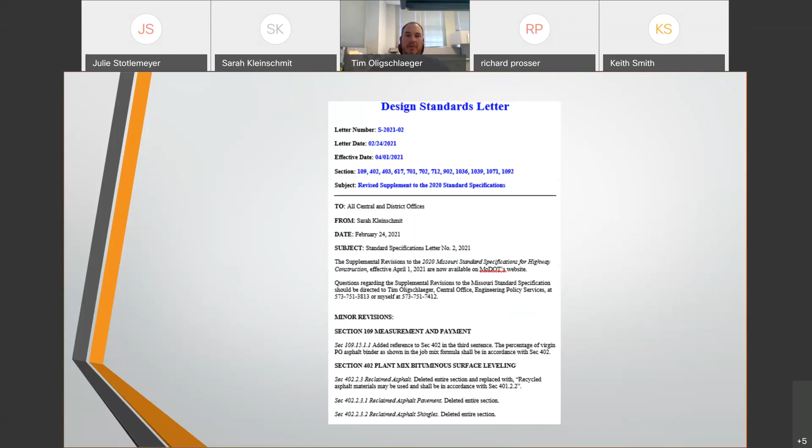There are a couple ways we try to inform you that we have revised our policy or our standard specifications. One way is through the Guidance Center. You can access the Guidance Center through the Design SharePoint site. In the second row, you'll see the engineering policy logo. Click on it, and then click on Guidance Center in the middle of the page. You will also notice that you can access the EPG, design letters, JSP, specs, and standard plans here. So this probably wouldn't be a bad page to bookmark.